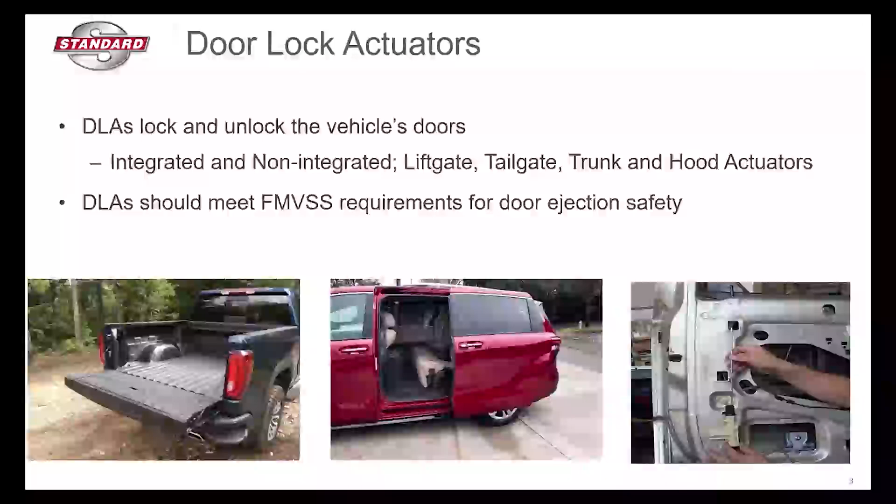This is a big deal when we talk to our customers, making sure they understand, sure, you can go online and probably find something very cheap, get it in a week, but will it meet that requirement? A lot of times the answer is going to be no. So that's a very big, important thing. With door lock actuators, we have seen a lot of evolution. Again, I talked about integrated versus non-integrated. We can go back 30, 40 years and talk about different versions, but let's look at 2005 and up.

From 2005 to 2015, we still had a lot of separation. We had separate door lock actuators, a motor plus a linkage. They had basic lock and unlock features with key fob control, and you would find those in most mass market vehicles, where the key fob unlocks the front doors, but you still have to lift the hatch manually. Well, we bump into 2015 through 2020.

Now we see a lot of adoption in the integrated door lock actuators and the early e-latch system, which allows for soft closing, anti-pinch, and even sensor integration. We saw that a lot, more so on the luxury brands and some mid-range vehicles.

Now, when I say mid-range, that can also include different levels of vehicles. For example, I have a 2013 Ford Escape. It's the low end model, so I have to lift the gate manually. But if I were to go up 3 or 4 levels and get the titanium or premium model, then I would have the auto function on the key fob to lift the gate integrated. So we saw a little bit of adoption there throughout different systems.

Now we fast forward to today, between 2020 and 2025. Most of the manufacturers out there have moved into that fully integrated e-latch system. Again, that's going to include a lot of the stuff that came with the 15 to 20, but we're also now going to have cinching.

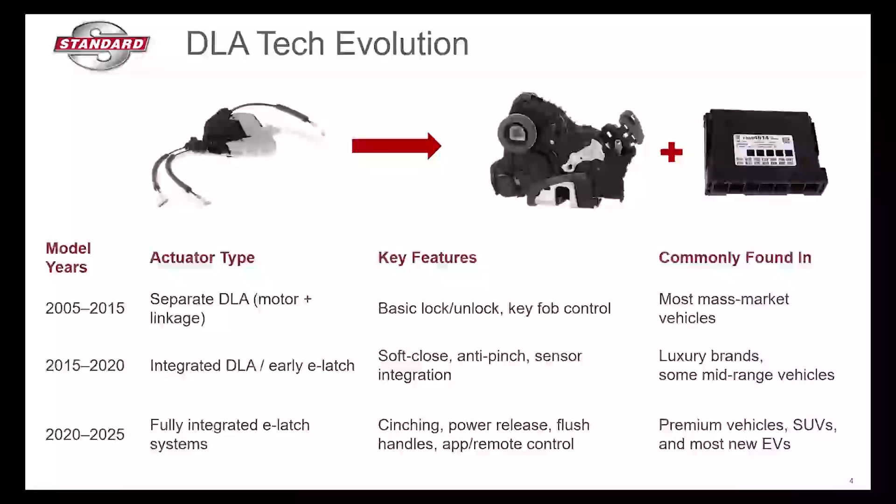And with that evolution, we've seen a lot of different reasons why these can fail. There's obviously wear and tear, right? That constant usage of the door lock actuator can just wear them down. We see this a lot with fleets and municipalities, especially police vehicles, EMS, and all those Ford F-150s and Chevrolet trucks running around checking meters and things like that. A lot of wear and tear on these systems.

We can also have electrical issues now. These systems are integrated, going through, in some cases, the body control module, sometimes a door control module, working through the ECU. So any issue with electrical current getting to the door lock actuator can be a big issue.

And some of that is caused by moisture and corrosion. 25 years ago, if you accidentally left your window down in a rainstorm, it would probably rust something or cause a little bit of an issue with the door latch or locking mechanism, and you could just replace a quick part. Well, not anymore. If you do that today, there's a lot of electronic components inside the door behind that panel, including the window motor, the regulator, the door lock actuator, and all the wiring that goes to the body control module or the ECU.

So moisture and corrosion are a big deal when it comes to these components now. We can't just leave the window down and wipe off the brim and say it's good. Obviously, if we get water down in there, it's going to cause issues, so we want to be careful about that. And then, of course, physical damage. In some cases, just slamming the door really hard one time can do a lot of damage inside of that door, behind that panel, and we won't notice it until we start having problems with our doors not locking and unlocking like we want to.

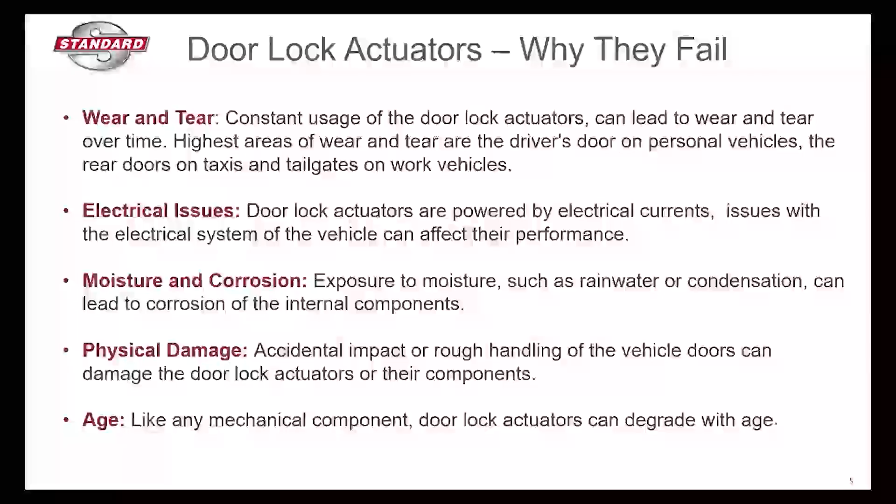So there's a lot of reasons why they will fail, but really it's overuse and allowing moisture and corrosion to build, or water to get in there and cause electrical issues. We also have a lot of TSB and recalls when it comes to door lock actuators.

And Ford's not alone on this. We just picked on Ford here because I love the saying here: Ford recalls 2.2 million vehicles again due to faulty door latch systems, right? So this particular part number, DLA 1482, covers 3.7 million vehicles in operation on the road today.

And who knows if they've actually all been taken care of in a recall. I think we all get recall notices and just walk away from it. Well, there's a time limit on that, right? If you pass that time limit, they're not required to fix that for you anymore.

And in a lot of cases, that's what's on the road right now. So we have a lot of opportunities just with that one part number that was already faulty directly from the manufacturer. So there are the regular wear and tear reasons that they fail, but there's also a lot of issues in the OE, the original manufacturing of these door lock actuators. So it gives us a great opportunity, especially if you look at the year ranges on here, 2014 through 2018, that's already in our sweet spot of the vehicles that we can cover and take care of on pretty much every category basis.

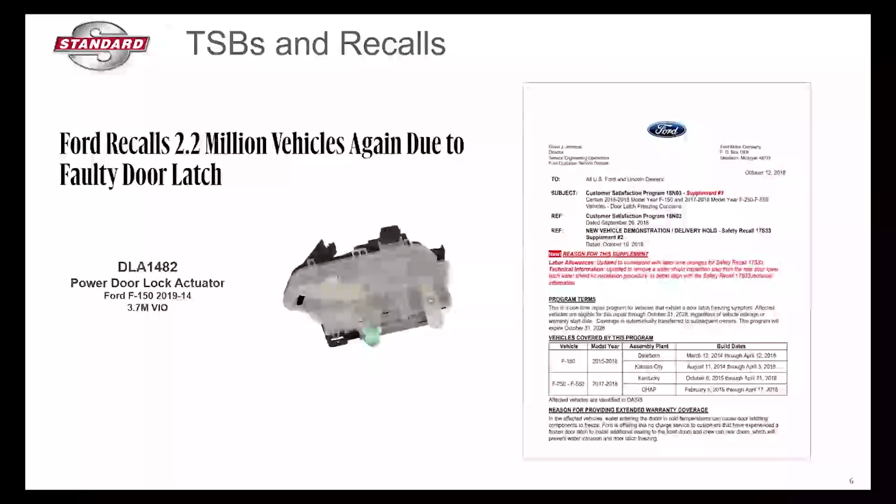So door lock actuators are no different, and it's going to be a great opportunity for us. So before I pass it over to our product team, let me just give you a couple tips here. This is when we're talking to not only technicians, but even DIY customers coming in the store. We have to make sure they remember the door latch is separate from the actuator on most vehicles, so we need to remind them to also inspect the latch before installing a new door lock actuator.

It could be that the latch is part of the problem and may have caused part of the failure with the mechanical portion of the door lock actuator. So we don't want to replace one and not the other. It'd be kind of like putting a new ignition coil in a motor with a bad pigtail, right? We want to make sure both are working properly.

And we also want to remind them to verify the actuator is getting power. So you have years of opening and closing the doors, and it can cause damage to the wiring, especially in the door jamb itself. When you open that door, right up in the door jamb, you see that thick wire loom that comes out. That is one of the most common places that these will fail.

And a technician may end up replacing 2, 3, 4 door lock actuators, and they don't work. They keep getting sent back under warranty, but the reality is they need to go check that door jamb and make sure that none of those wires are pinched, cut, or frayed, because that's the main hub right there. Everything under the dash that controls the door lock actuator sends the signals through that loom, through the door jamb, to actually send the signal to the door lock actuator.

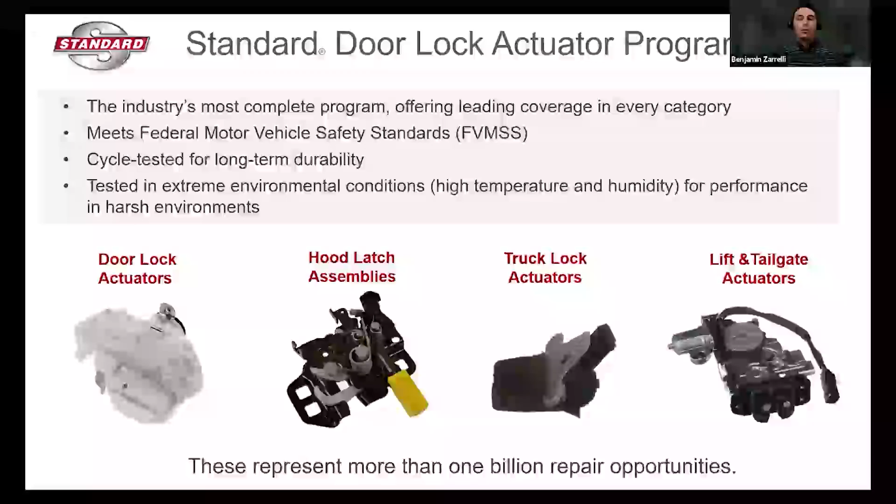Our DLAs are built for performance and reliability. Each unit undergoes rigorous environmental and endurance testing to ensure long-lasting operation.

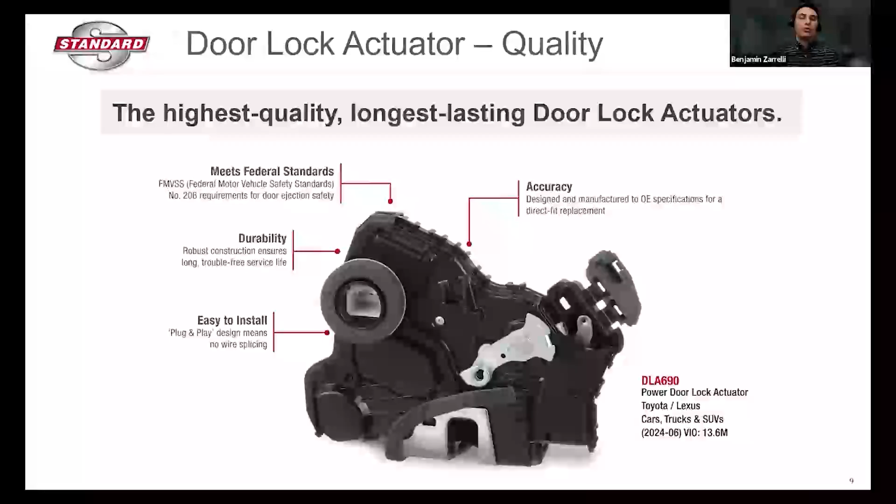Our precision manufacturing means the parts fit right and work right, and with decades of research and development behind them, our actuators are engineered to address common OE failure points and provide a dependable long-term solution.

Before I get into this slide, I'd like to take a quick moment to introduce myself. I'm the product manager for this line, but before this, I was a parts manager at a dealership. For years, I've worked hand in hand with mechanics, as the counter person ordering inventory and dealing with customers directly. I share this to express that I know what it's like being on the other side of that conversation.

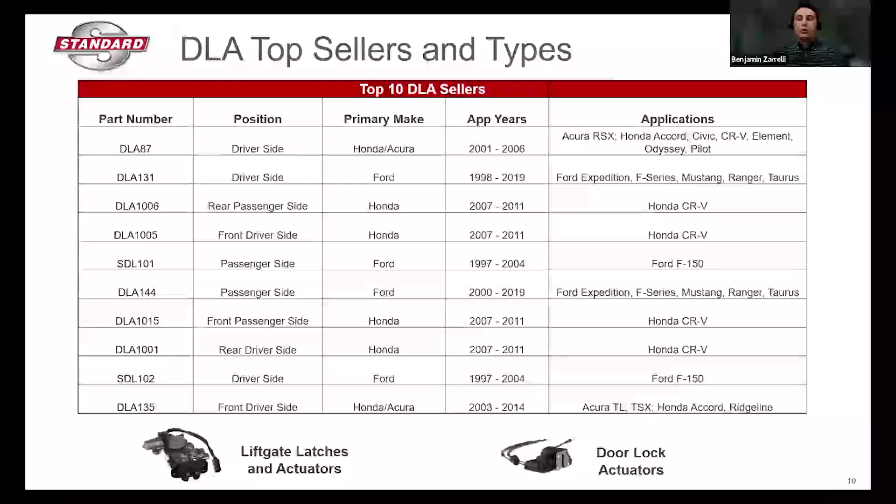As a quick example, if you take a look on the right hand of the chart, you'll see they cover major makes such as Ford, Honda, and Acura, as well as their major models like Ford's F-Series and Honda's CR-V and Civic.

Every DLA we offer meets the Federal Motor Vehicle Safety Standards for door ejection safety, aligning with OE level expectations. Our catalog now features more than 1,127 SKUs, and we're planning at least 23 more releases in 2026. My job as product manager is to continuously support this line and regularly evaluate carry-up coverage.

With extensive research, we regularly add vehicle coverage with existing part numbers, to ensure applications aren't missed and sales aren't lost. With focus on quality over quantity, we are smart about our coverage and consolidation and are able to offer better coverage with less part numbers compared to our competitor.

One example of this is part DLA 1532, where by removing cables and eliminating unnecessary brackets, this enables us to offer actuator-only solutions, allowing for this actuator to be interchangeable between the driver and passenger side.

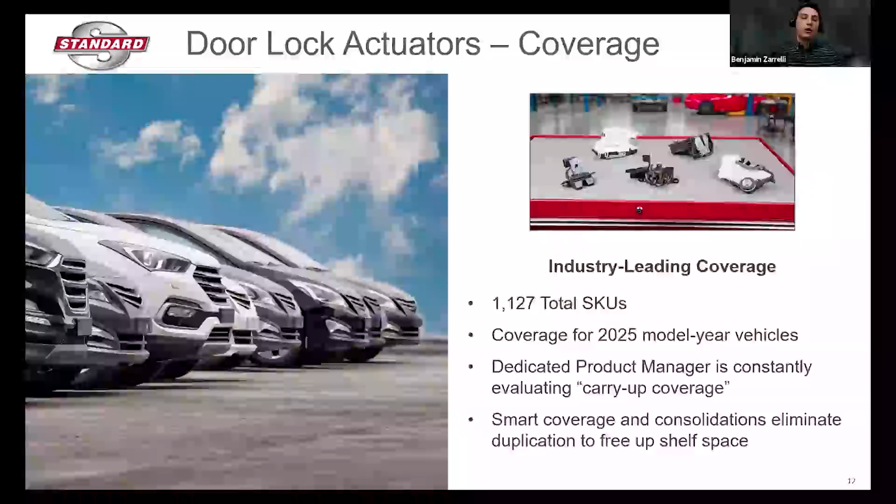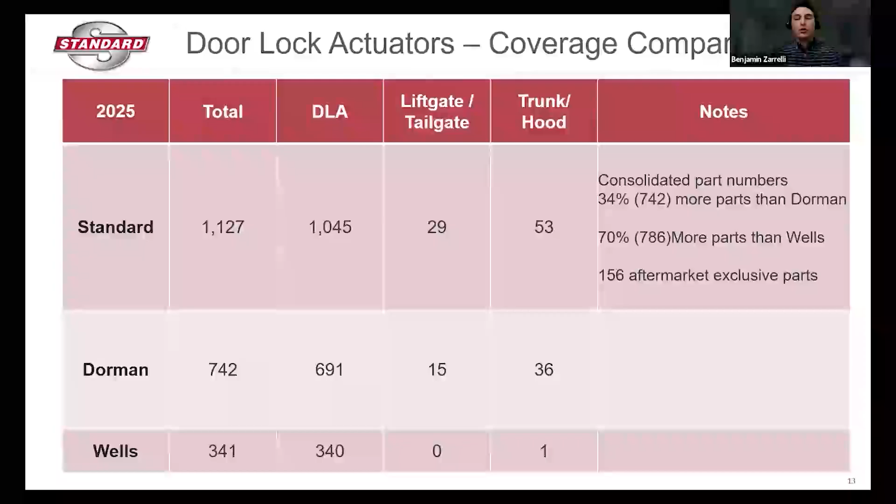Here we compare our DLA coverage to key competitors. Standard leads the category with over 1,100 total parts, far ahead of Dorman and Wells. We also offer significantly more liftgate, trunk, and hood actuators, while also offering 156 aftermarket exclusive parts. Overall, this positions us with the strongest coverage and the most complete DLA program in the market.

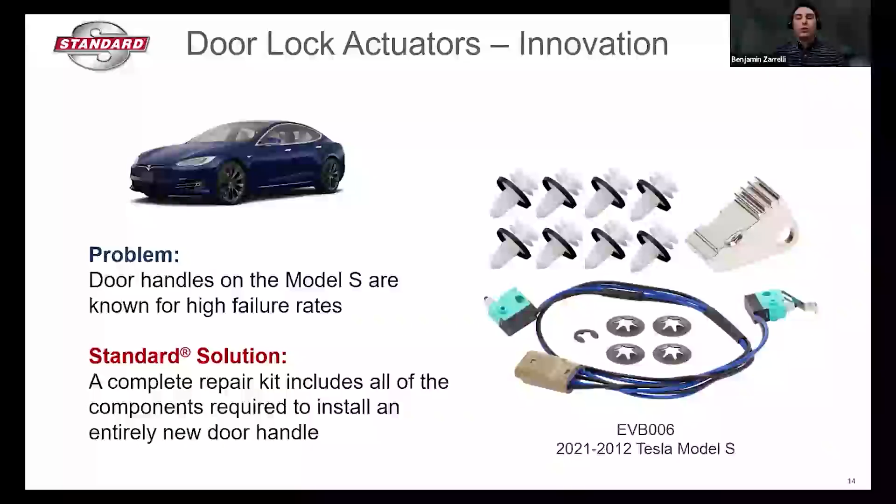Finally, I'd like to highlight part EVB006. While this part demonstrates our ability to bring complete problem-solving kits to the market, it also shows that we're committed to developing parts for electric vehicles.

And with that, I'll finish things on the product side, and now I'll pass it over to Aaron with marketing. Thank you for your time.

Awesome. Yeah, thank you very much, Ben. That was great. Thank you.

This category is maybe a little bit unique. It's one of the categories that we offer that you're able to bring to multiple types of repair facilities and customers. So thinking about who it's worth talking to about this category, I think the first one is fleets and municipalities.

If you're in an urban area, folks managing fleets for Uber or taxi cabs are unique because they actually tend to wear out the rears faster than the driver's side on door lock actuators, just because of use. Other fleet vehicles have folks getting in and out of 15, 20 times a day. For you outside salespeople, this might be right up your alley.

I know how many times you guys get in and out of a car. But that's reality. Fleets and municipalities tend to be a pretty good market for door lock actuators.

Of course, general repair facilities are heavily involved in replacing these as they fail for mechanical failures. But then the last thing is collision centers. Not every category or part we offer makes sense to bring to collision centers, but this is certainly one of them, and it's not just the doors—it's often the hood or trunk lock actuators that are damaged in collisions. So there are multiple outlets we can bring this category to.